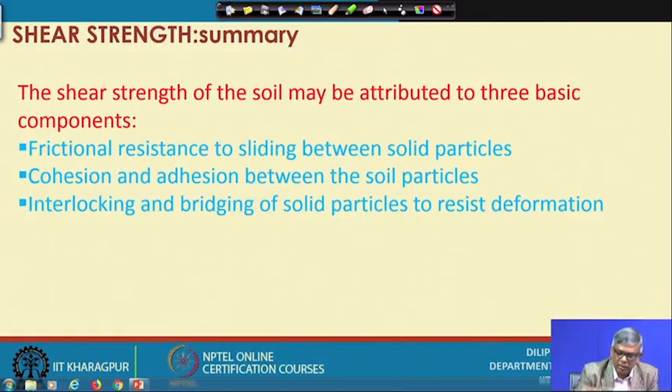Next, as I mentioned before, at any point in a soil mass you can define the state of stress in 3-dimensional form. Finally, I mentioned that for most applications we can use the 2D biaxial form, and it does well. In biaxial format, if you know the state of stress, then we can also find the stress on a plane with any orientation.

If the plane is oriented at theta as given here, then sigma and tau on that plane are given here, and the theta where sigma 1 and sigma 2 become maximum, I have also given that expression. These things are to be remembered; you may frequently use them when you do problems in shear strength.

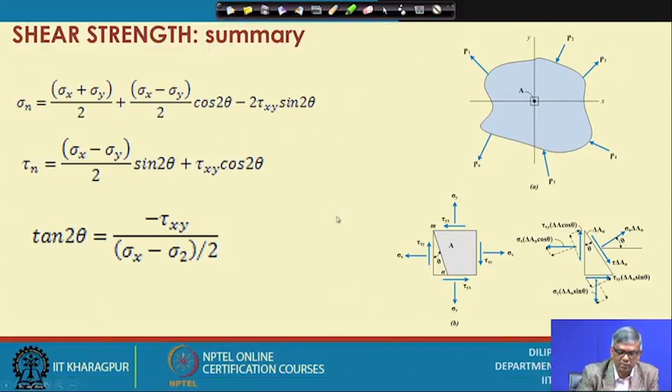Next, I have also shown that the plane orientation theta can be anything. With the variation of theta, the locus of the tau and sigma values we get is a circle, and the equation of the circle we have shown before, with center at (sigma x plus sigma y by 2, 0) and radius equal to this. This I have also highlighted.

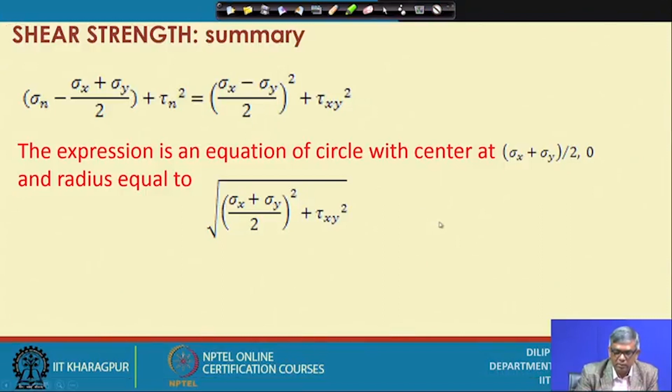Another important thing I mentioned is the use of the Mohr circle. If you know the state of stress, you can draw the Mohr circle, and these are the various aspects of it. If the origin is chosen here and you know sigma 1 and sigma 3, then I get these two terminal points, and this will be the diameter. Take the half point as the center, draw the Mohr circle, and there we can find out many things.

Or if the state of stress at a particular point is given, for this element, this side gives a unique point here, and similarly this one comes here. So if I get this point and this point, I again get the diameter, or if I know sigma x and sigma y, I can find the radius, locate the center, locate one point and draw the circle to get the Mohr circle.

After drawing the Mohr circle, I will read this as the maximum shear stress, this as the maximum normal stress, this as the minimum normal stress. If I want to find the normal stress and shear stress on any plane oriented at theta, I will rotate theta like this, and it will intersect here. I will directly read the normal and shear values from the circle.

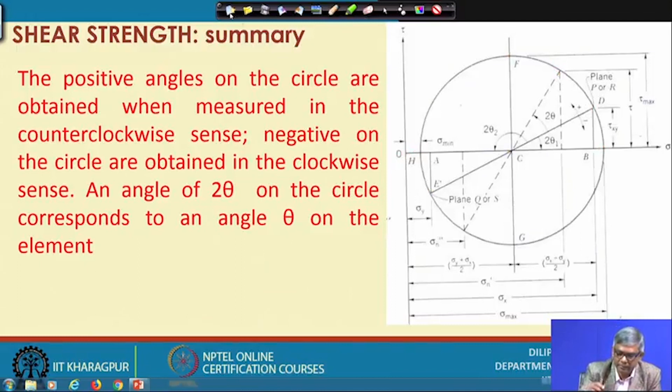Similarly, I have mentioned principal plane and principal stress. The principal plane is a plane that is acted upon by normal stress only. That means, if one element is here, and another element is here, and shear is also acting like that.

This plane is not a principal plane, whereas this plane is principal, because there only normal stress is acting. Similarly, the normal stress acting on a principal plane is referred to as the principal stress. On a plane where there is no shear stress, whatever normal stress is acting, that is the normal principal stress.

At every point in a soil mass, the applied stress system that exists can be resolved into three principal stresses that are mutually orthogonal. The principal planes corresponding to these principal stresses are called major, intermediate and minor principal planes, named from the consideration of the principal stresses that act upon them.

The principal stress known as the major principal stress acts on the major principal plane. So suppose this is sigma 1, the major principal stress, and this is sigma 3. This is already elaborated before, so once again, what is principal plane and what is principal stress, I am summarizing here.

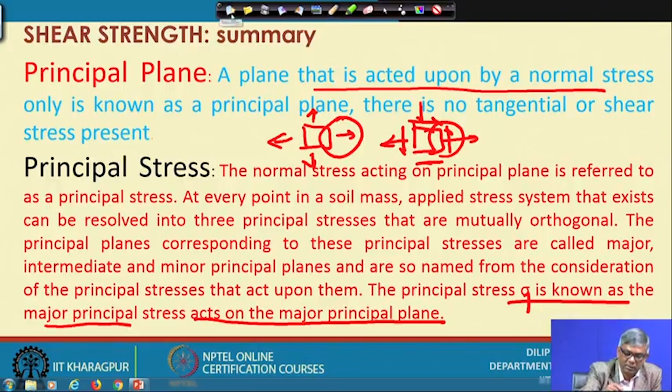Suppose this is the major principal stress direction, so the major principal plane will be this one. Similarly, if this is the minor principal plane, then this is the minor principal stress.

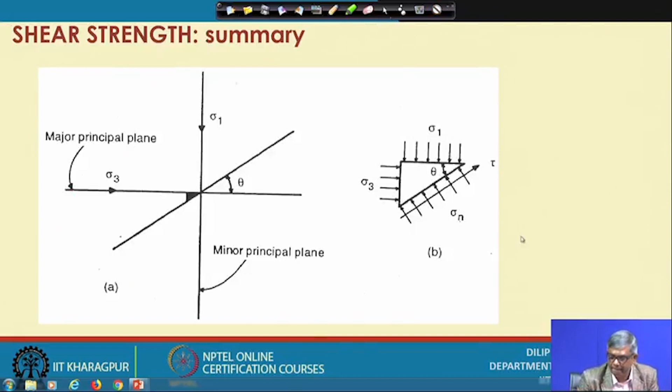If this is the one, then theoretically we can express the value of tau and sigma n in terms of sigma 1, sigma 3 and theta. If I orient the plane, and if I know sigma 1 and sigma 3, and the failure plane, then on that plane what is tau and what is sigma n, I can find out using this expression. We also have a slightly different form of equation, but they are the same.

If you simplify it trigonometrically, you will get another form. That is also shown before.

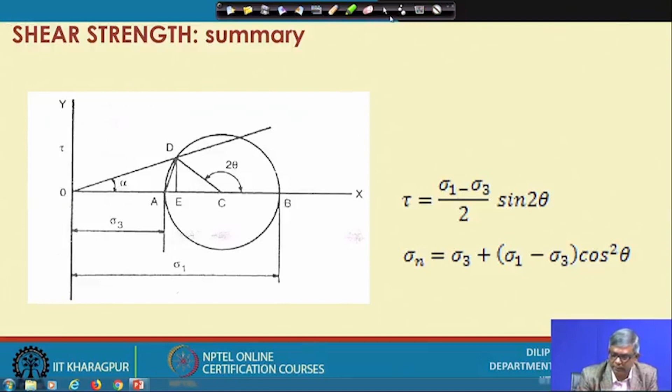You can see the relationship between theta, the failure plane, and phi, which is also important. If I know the phi value, I can automatically find the value of theta, the inclination of the plane with the major or minor plane: 45 degrees plus phi by 2. How is this done?

This is the envelope and this is the Mohr circle. If I join from here to here, this is a right angle, and if this is 2 theta, and this will be a symmetric triangle because these are same and this is also same, then this will be theta. From there, considering this triangle, the ODC triangle, the sum of the three angles will be 180 degrees. From there we get theta equal to 45 degrees plus phi by 2. This is also another important thing to remember.

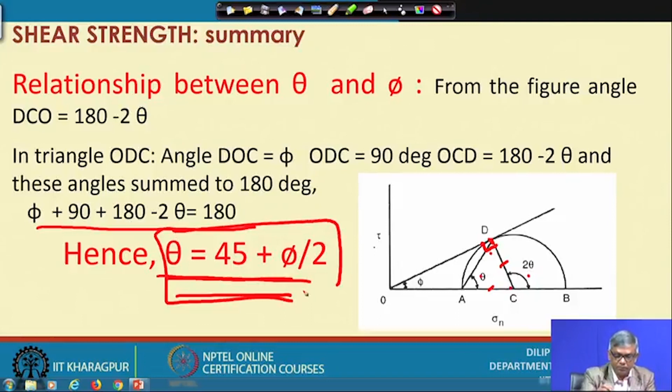We have mentioned that shear strength in terms of total stress parameter has this equation, and in terms of effective stress parameter, this is the shear strength equation. This is the Mohr-Coulomb equation, a general form, but for sand, C will be 0, so for sand the equation becomes tau equal to sigma tan phi. Whereas for clay, phi equal to 0, so for clay tau will be equal to Cu.

This is one form of the shear strength equation with phi and shear parameter. Then this is another expression we have given, involving sigma 1, sigma 3 and the soil's phi and C. Sigma 1 is the major principal stress, sigma 3 is the minor principal stress, and C and phi also have a relationship. This relationship is important, and frequently we use it if we do not have graph paper and want to solve analytically, so this equation is sometimes useful for getting the value of C and phi.

When you use the total stress parameter, this is the equation. When you use the effective stress parameter, this is the equation. They are the same, only wherever there is total stress, it has to be replaced by effective stress: sigma 1 will be replaced by sigma 1 dash, and sigma 3 will be replaced by sigma 3 dash.

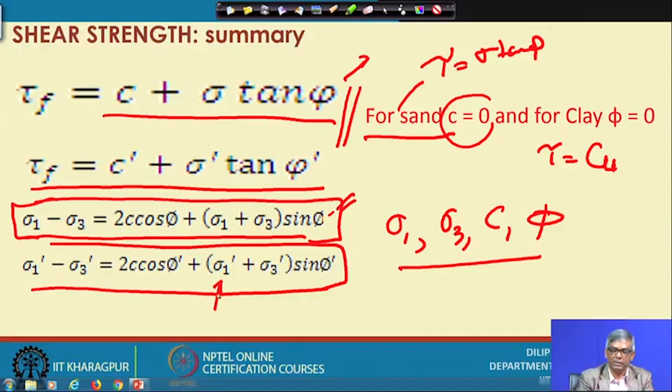For determination of shear strength parameters, once again summarizing, there are 4 different methods. There are many other methods also, but at undergraduate level we cover these 4: direct shear test, triaxial test, unconfined compression test, and vane shear test.

The triaxial test will have several variations that I will summarize next. For the unconfined compression test and triaxial test, the only difference is that in the unconfined compression test no cell pressure is applied, that is, the sample is unconfined.

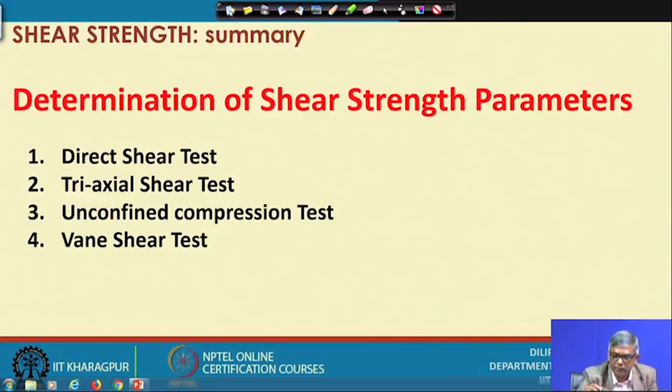During the triaxial test, we apply the confining stress, and then we apply the deviator stress. Schematically or stage-wise, how we do it, and finally what we get, sometimes we need to understand. For that I have also brought this one here.

You can see during the test, this is the condition: the sample is subjected to sigma 1 on this side at failure, and subjected to sigma 3 in this direction. This is the final form, but this final form is developed based on this.

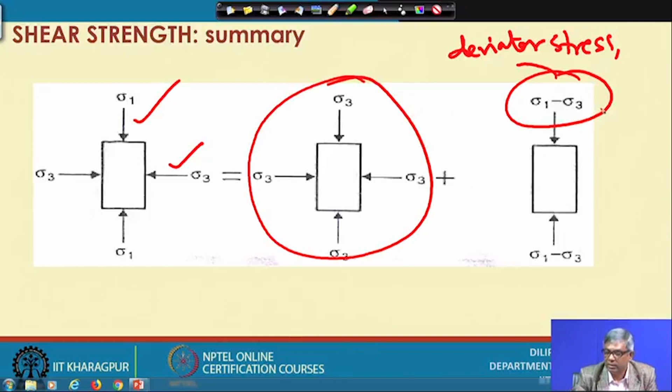Initially we apply sigma 3 all around, and then later on we apply the deviator stress, sigma 1 minus sigma 3. So this is called the deviator stress, sometimes called the principal stress difference, and sometimes it is called the additional axial stress.

Any term is used, so you have to understand they are the same — sometimes it will be used as delta sigma, sometimes delta sigma d, like that. At failure, of course, sometimes an additional f will be given. So if this is schematically or symbolically given, you have to understand that the second stage of shearing test, during shearing whatever we apply, these are all the same.

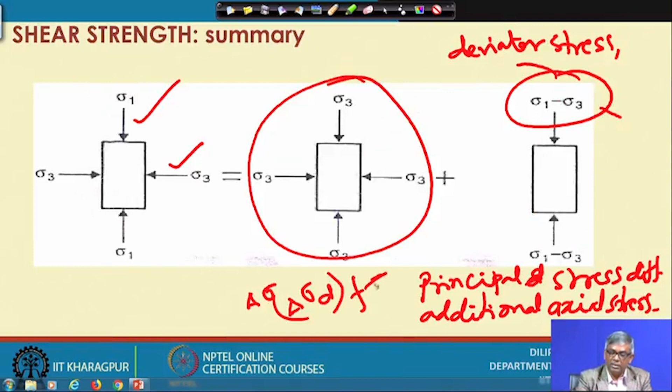As I have mentioned, triaxial test is a universal test. You can simulate the actual field condition or close to the field condition, and to do that we have several mechanisms of test: one is unconsolidated undrained test, consolidated undrained test, and consolidated drained test.

There are three different tests. In unconsolidated undrained test, we apply confining pressure, and immediately by applying deviator stress we go up to failure. It takes very little time, and from there we get only the undrained shear strength, Cu.

Whereas in consolidated undrained test, initially by applying confining pressure we consolidate the sample, and later on we shear by applying the additional axial load, but without draining.

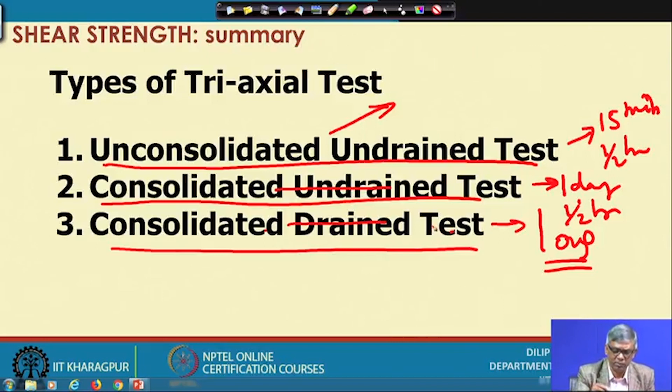So for routine work we do this one, but for some important work we need to do either of the other two, though we do these only occasionally. We do this one with additional measurement of pore pressure during shearing, and from there we can get the result of the drain test. That detail I have shown — once again I will show you how to do that.

As I have summarized, during UU test on saturated sample we get undrained shear strength independent of confining pressure. That means if you measure the pore pressure during shear, and finally convert into an effective stress circle, you will get only one circle, and the circle size will also be the same — that's what is shown here. The shear strength envelope will be tangential to this. So this one will be half the diameter, and the diameter is nothing but sigma 1 minus sigma 3. That can be obtained by this, as we have given before.

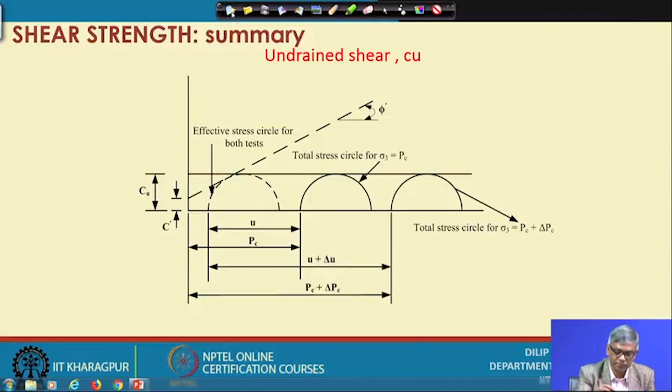For CU test — consolidated undrained test — if you draw the circle here and get a common tangent, you get phi u, as I have mentioned. CU test can also be utilized as a CD test by measurement of pore pressure during shearing. If you measure the pore pressure additionally, and whatever confining pressure and additional principal stress you got at failure, the pore pressure is subtracted from that to get the effective stress. Drawing the corresponding effective stress circle and a tangent to it, you get another envelope which will be steeper than the earlier one, and the angle from there is the effective stress friction angle. So in CU test, both total stress friction angle and effective stress friction angle can be obtained.

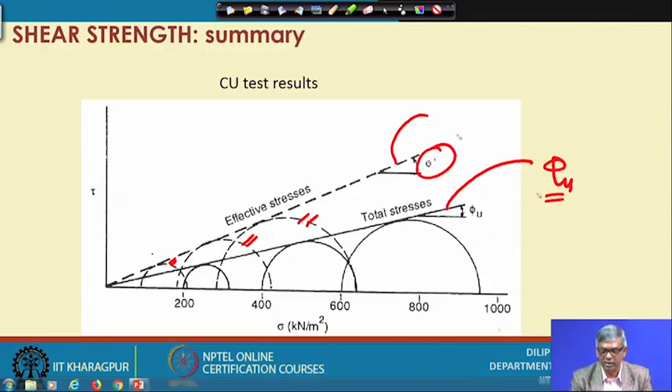This we have discussed before; once again I am highlighting it here since it is important.

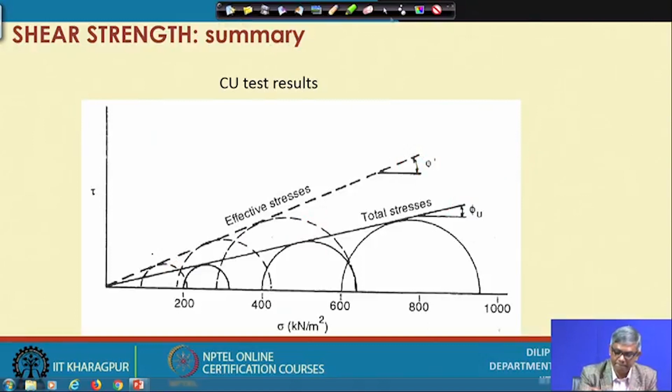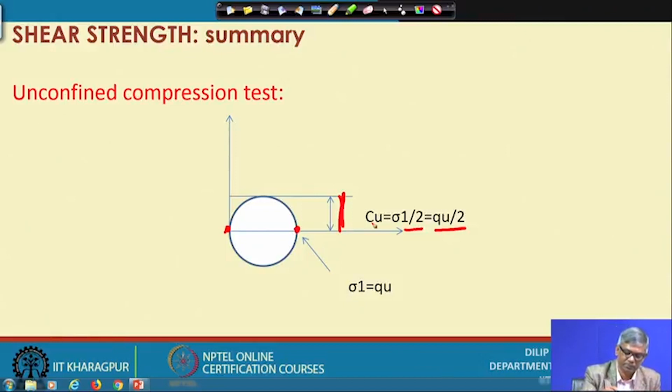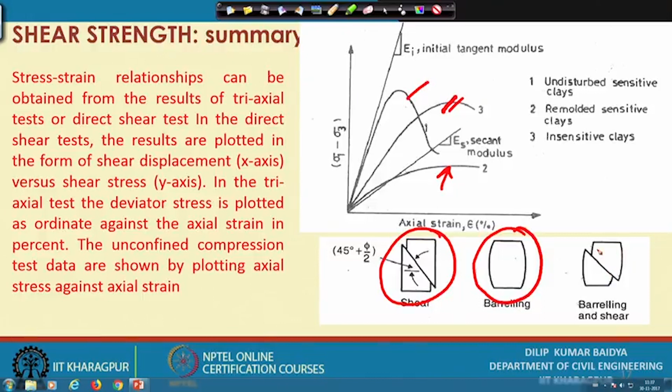During shearing, soil can fail in different ways. One way is shear failure showing a prominent shear plane. Some soil fails without any prominent failure angle, continuously decreasing in length and increasing in diameter, but to terminate the test we generally stop at around 15 to 20% strain level. Some soil may fail by both shearing and barreling together, showing a prominent shear plane along with some volume bulging.

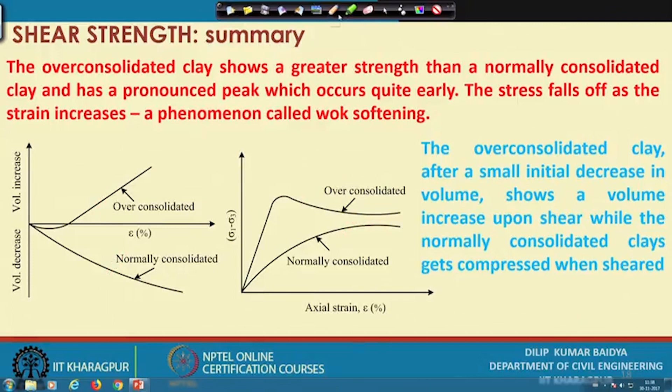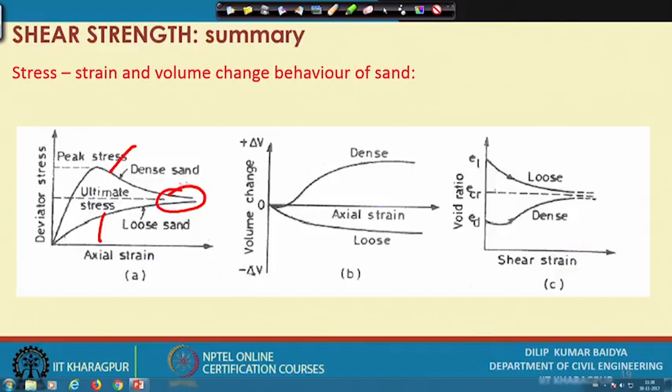This is again the stress-strain behavior of sand. If it is loose or dense, dense is this curve, loose is this curve, and both values will reach nearly the same at large strain. Ultimate stress for both loose and dense sand will be nearly equal. For dense soil, volume increase generally occurs after a certain strain, whereas loose sand will continually decrease in volume, and correspondingly we can find out the critical void ratio.

So from this diagram, we can conclude that if the soil has a void ratio greater than the critical void ratio, it means the soil is loose, and during shear it will decrease in volume. So void ratio is large, meaning loose, and then it will continue to decrease, meaning the void ratio will be decreasing.

Whereas if the void ratio is lower than the critical void ratio, meaning it is dense, then during shearing volume change will take place, but volume will increase, so void ratio will be increasing. Finally, it will reach a constant value, whether starting looser or denser than critical, and if you increase the strain level, both will come to a common value equal to the critical void ratio.

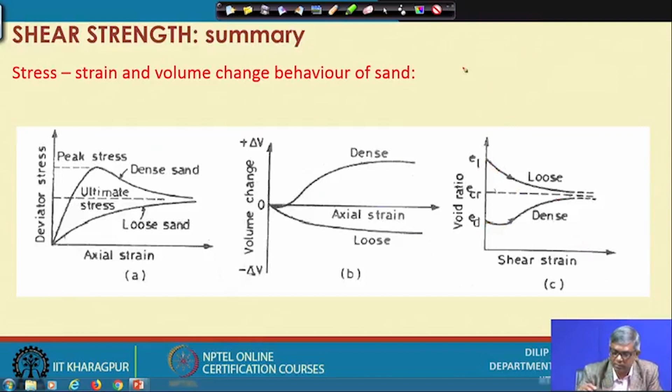Finally, whether it is normally consolidated, over consolidated, loose sand, or dense sand, we can perform different tests. For example, direct shear test is suitable for sand and saturated sand. Triaxial tests can be applied for both cohesionless and cohesive soil, and unconfined compression test can be done only for saturated cohesive soil.

We have also mentioned that in some soft sensitive soils, sampling is difficult, or sampling can be done, but during the sampling process its properties change significantly. For such soils, instead of sampling directly, in situ tests can be done, and one such in situ test is the vane shear test.

The vane shear test details I have shown before: there are 4 blades welded to the rod, with a 90 degree angle between each pair of vanes, and the vane is pushed into the soil vertically and rotated by applying torque. When the applied torque is equal to or greater than the resisting torque of the soil, this indicates failure.

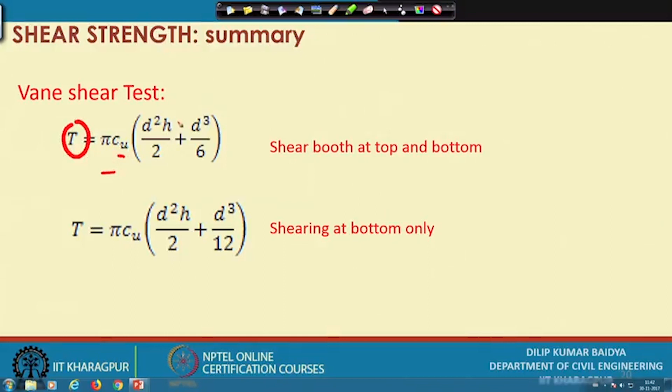From that failure condition we can find out the value of Cu. The applied torque can be expressed in terms of Cu and the blade dimensions, and from this expression we can find Cu.

When you do a vane shear test, resistance may come from both top and bottom, or sometimes only from the bottom. If you consider resistance from both top and bottom, this expression can be used, and if there is no resistance from the top, only resistance at the bottom, then this other equation can be used. So with the vane shear test, we can directly get the value of undrained shear strength of the soil.

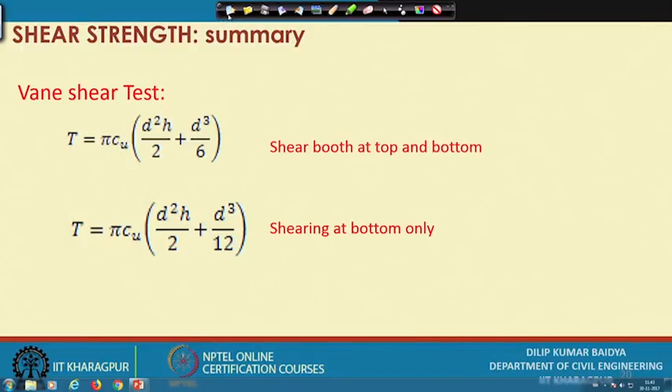So by and large, that is all about shear strength. I think I will go to the next topic from the next lecture. With this, I conclude the shear strength topics. Thank you.